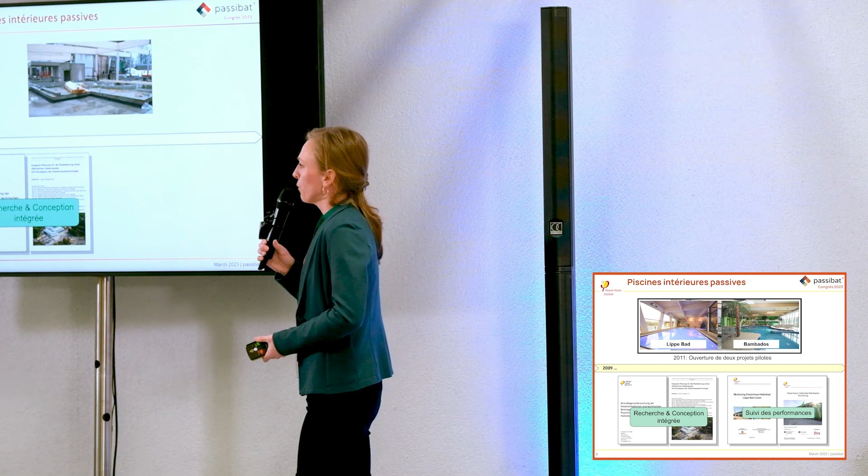And we were very fortunate that in 2009, when this whole journey started about passive house for swimming pools, we were approached by a municipality in Germany, and they said, we want to explore this. We want to see what the energy savings are. We got funding for a research project based on an example of a real-life project.

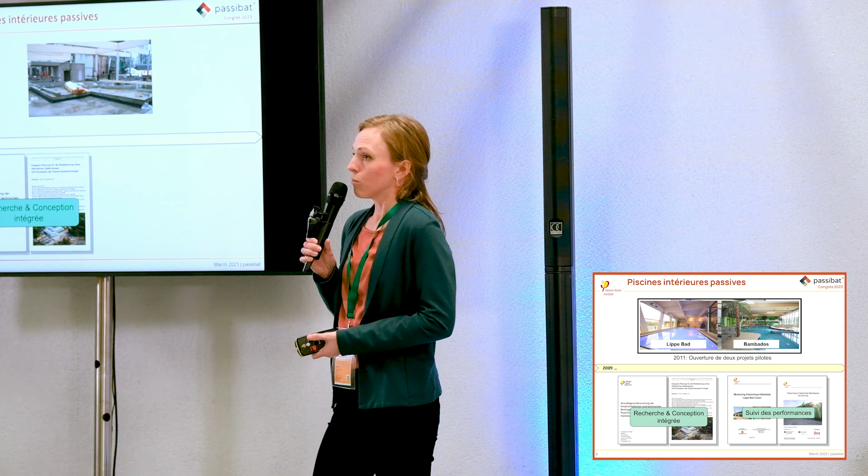That was the first pilot project built in Germany as a swimming pool to the passive house standard. A second one quickly came on board, and these first two pilot projects, the Lippebad and Bambados, they both opened their doors in 2011, implementing these energy-saving strategies that we'd researched and developed together with the teams.

As proof of concept, which is super important in order to move things forward, we had 2 years where we were able to monitor both of these projects in quite a lot of detail to check what the actual energy consumption is and whether the research that we'd done in advance was turning out in practice. So that's kind of the step that we took starting 2009.

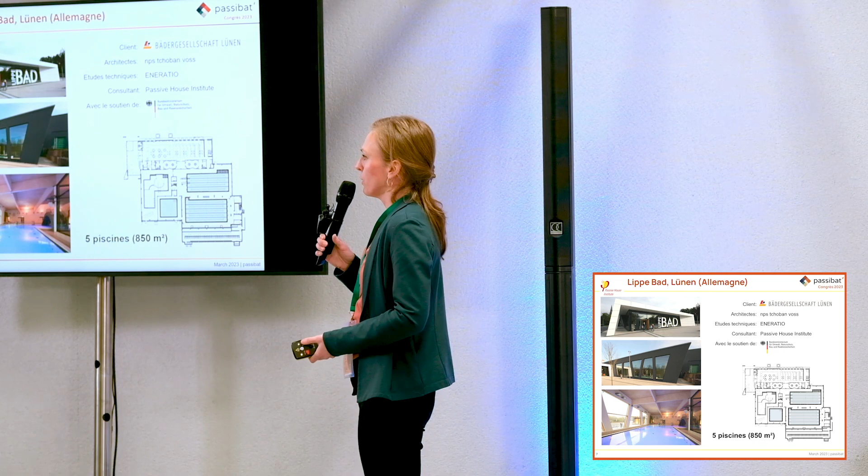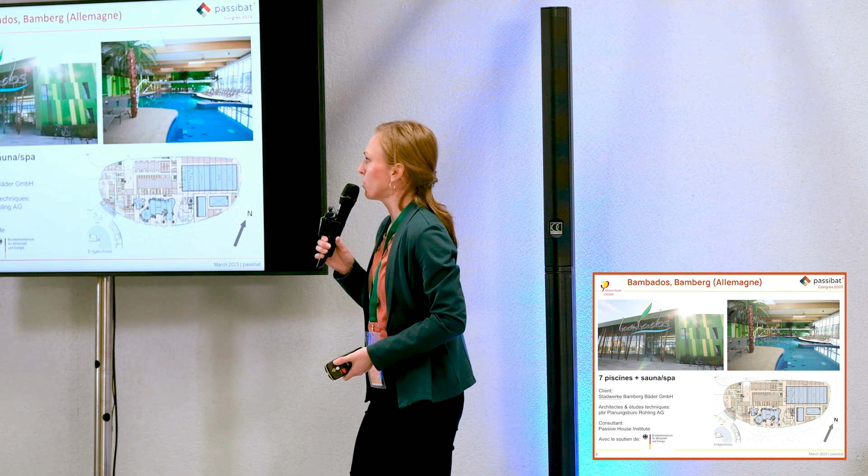A quick overview of the story of success for both of these projects. This is the Lippebad, which is a fairly straightforward project. It has 5 pools, but no kind of additional leisure facilities. And this is the Bambados project, which is larger. It has 7 pools overall, and it has also a sauna and a spa facility included.

So those were very successful, very, very popular. Which meant we were able to continue our research, build on what we'd done, see what additional energy savings we had, and we had additional municipalities coming up saying, this is really interesting, how can we implement this? The third project that's come online is the Exeter City Council project, which actually opened its doors last year in 2022, and is the third passive house project which is now in operation in the UK.

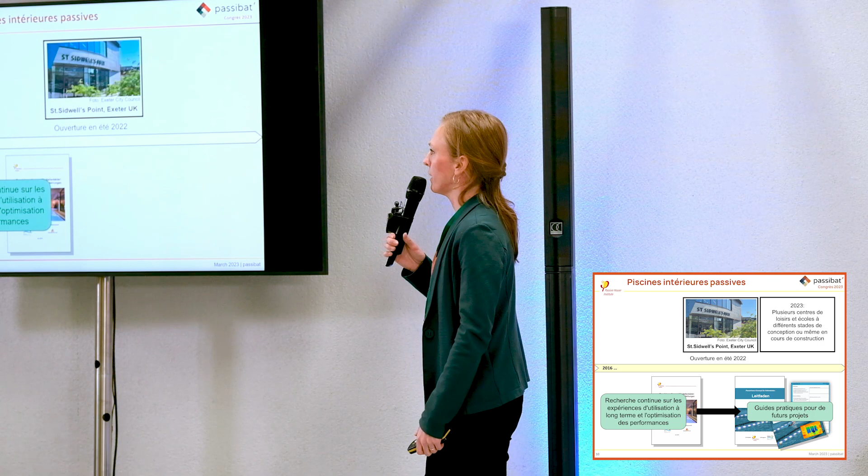What's come out of all our research work? So while we were consulting on the project in England, while we were doing additional research work, we consolidated all of that into a guideline booklet because we wanted to make sure that all of this information is published in a way that future projects can take this on board and implement those energy saving strategies in their project. And it's this guideline really that I'm going to present to you in a very, very condensed form today to give you an outline of what the energy saving strategies are.

We now have quite a lot of interest, especially in the UK, because that Exeter project has raised a lot of interest. So we're working on a number of projects in the UK now implementing these same energy saving strategies.

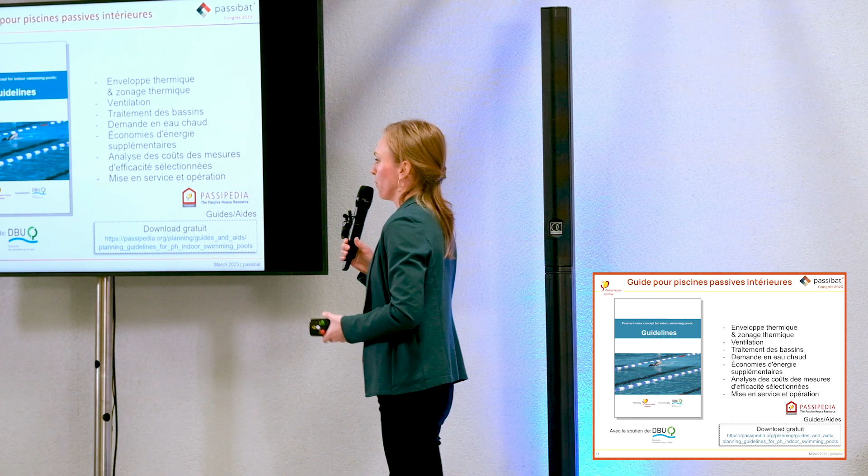So this is the guideline. It's published in both German and English, and available for free download on Passipedia online. It covers different aspects of energy saving, starting with the thermal envelope and thermal zoning within these buildings, but also looking at aspects such as water treatment, ventilation strategies, general energy efficiency strategies, and controls and operation to ensure long-term energy savings. I'm going to give you a very quick, condensed version of those main topics, but I do encourage you to go ahead and have a look at those guidelines if you're interested.

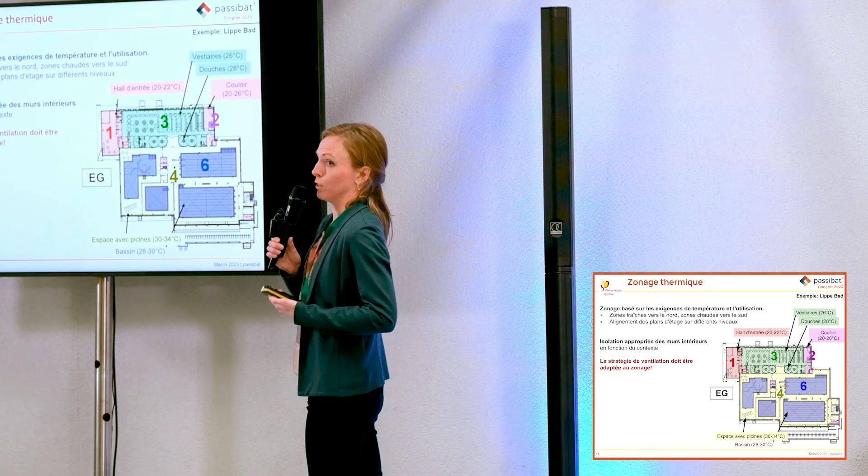Starting out with the thermal zones, this is really the starting point. When you design a building, a leisure center or a swimming pool, think about the different temperature zones you have in the building and the layout you're going to have. If you want an energy efficient solution, that's your starting point to make it cost effective and functional. In this example from the swimming pool in Lünen, we've got warmer temperatures, 30-34 degrees, for the pools facing south, then a buffer zone, the changing room around 26 degrees, and then a 20-degree entrance area. It's a fairly simple layout in this case, but that makes everything else a lot easier and cheaper to build.

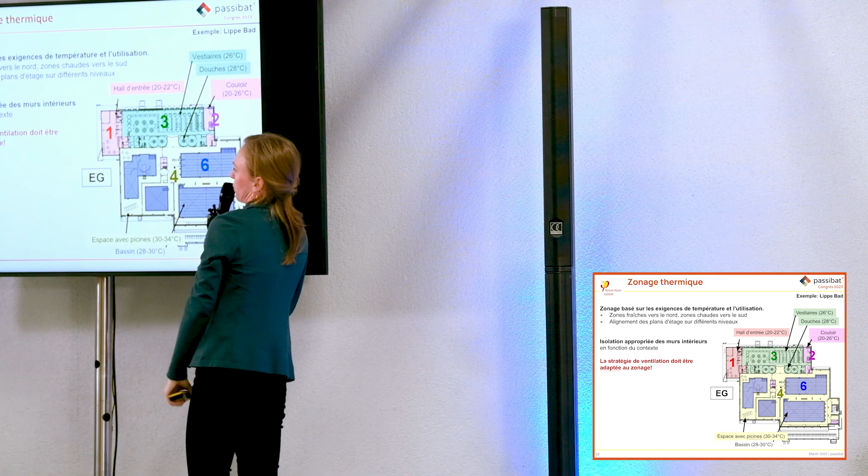Something to keep in mind is you might also need thermal separation within the building itself, which you don't often have in a passive house, but you do in this case, in order to separate these different zones. Also important is to try to align your ventilation strategy with these different zones, so maybe you have a different ventilation unit for each usage zone.

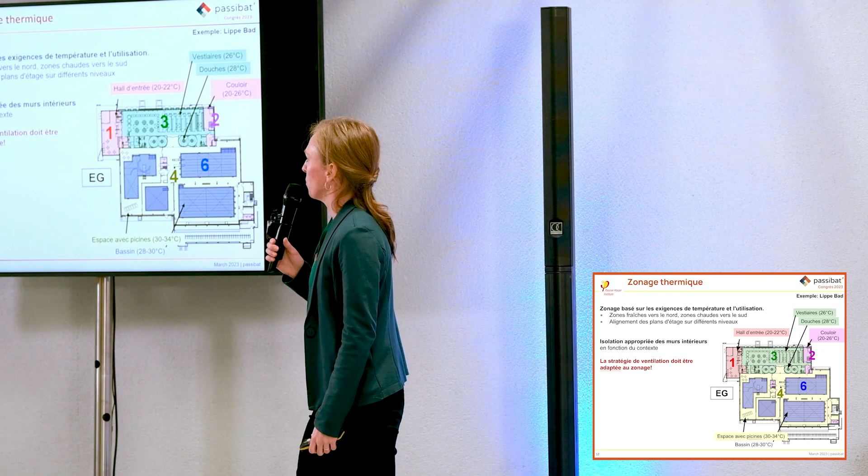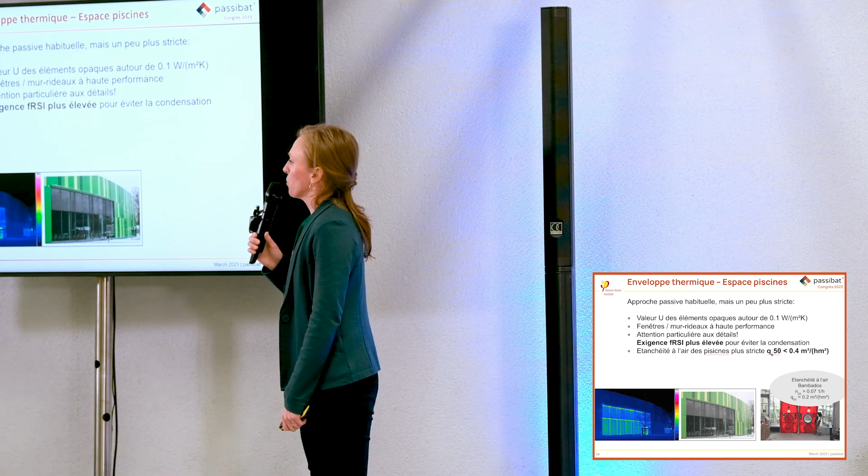In terms of the thermal envelope, I won't dive into too much detail because it's the same principles we're familiar with from the passive house, just slightly more strict. For a pool hall, we're looking at U-values of around 0.1 watt per square meter Kelvin. What's really important here is that we need to avoid damage to the construction, so we have slightly stricter requirements for thermal bridges, outlined here in the fRSI factor.

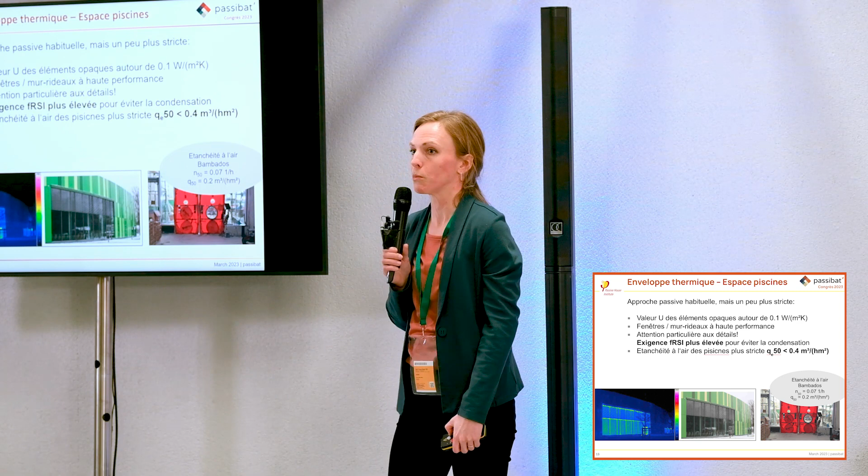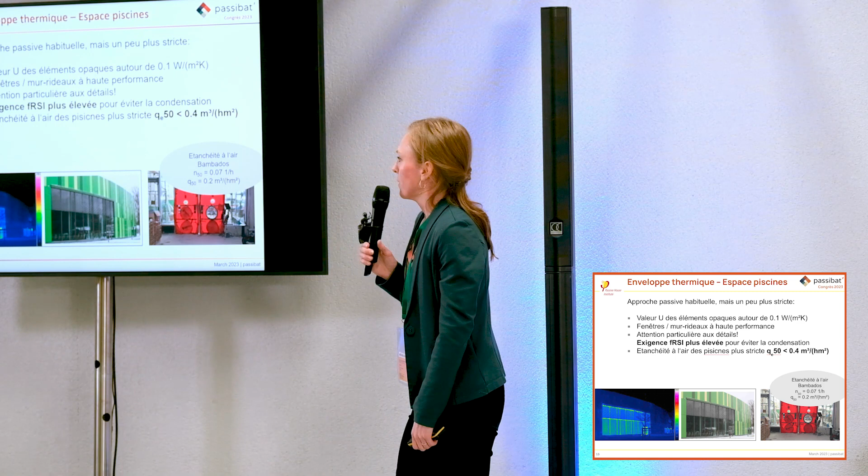In terms of air tightness, again we're a bit stricter, mainly because we're dealing with warm and humid air and want to protect the fabric. The development team in the UK, for example, was very scared when we issued this as our target for passive house certification, but all three projects managed to hit it without problem. This is the example from the Bambados, which had an n50 of 0.07 air changes, an incredible result. So it's doable if you know from the outset that's what you're aiming for and you have good quality control on site.

Overall, the passive house envelope is our entry door to energy savings. If we implement those 5 pillars of passive house that we're familiar with, we already achieve quite a lot of energy savings by reducing transmission losses. The really nice thing with the energy efficiency concept for pools is that the envelope is the starting point and enables you to dig deeper and achieve more energy savings by changing your mechanical systems and controls as well.

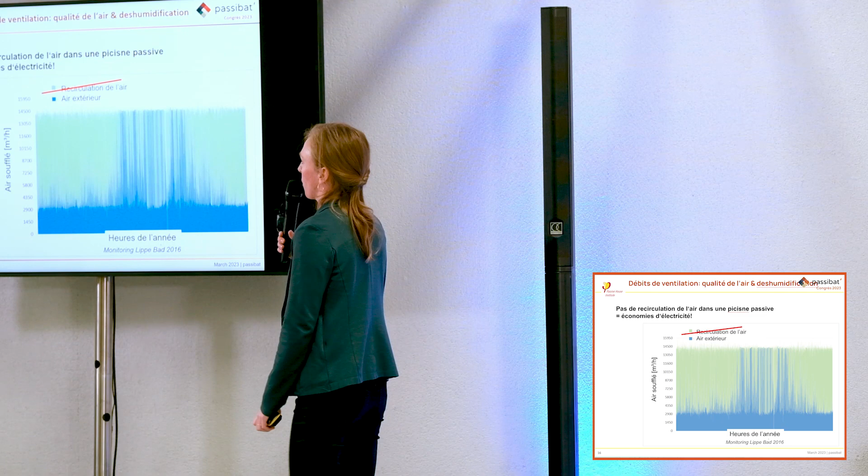Part of that is we now have a much improved thermal envelope, which means there's much reduced risk of condensation or mold on the facade, which means we can change the concept of ventilation in these pool halls. Conventionally, pool halls are run with very high rates of ventilation throughout the year, as we can see in this graph, measured from one of the projects. The blue here is what we need for dehumidification.

That physically is what we need over the course of the year. In winter it's quite low, in summer it's high because we have higher dehumidification demand. In green here in the background is what a conventional pool runs throughout the year as additional recirculation, because in a conventional project you need that air movement. We don't need that anymore in a passive house pool because our envelope is so good, so we can cut out all of this green part, which translates into significant electricity savings just by cutting out the recirculation air.

In addition, because we have a really good thermal envelope, it means that we can raise the humidity level at which we operate the pool. Raising the humidity level has different advantages. One significant one is that we have less evaporation. Less evaporation means less heat losses from the water. It also means less dehumidification demand, which means less ventilation, and so on and so forth. As I said, it gets quite technical, but the quintessence here is that because of that better thermal envelope and the higher humidity, we tap into more energy savings for our heating and electricity.

So that was a quick run through in terms of the main starting point for the pool hall. Obviously, there are many other energy consumers in these types of buildings. It's not only about the swimming pool hall. There are other energy consumers as well.

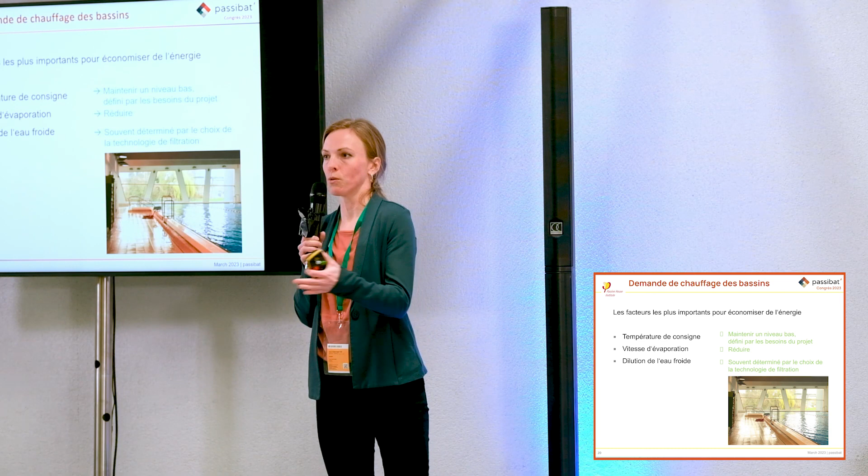Then last, but certainly not least, one of the most important aspects that decides your energy demand for the pool water is how much fresh water you have to bring into the pool in order to maintain its quality. This, quite interesting, is often not driven by the amount of people in the pool. It's actually driven by the choice of your filtration technology. Depending on what filtration technology you use, you have to keep those filters clean, you have to backwash them on a regular basis. And the choice of that filtration system often drives how much fresh water you're constantly bringing into the system. So it's worthwhile, when you choose your filtration system, to be aware of what kind of water demand that means.

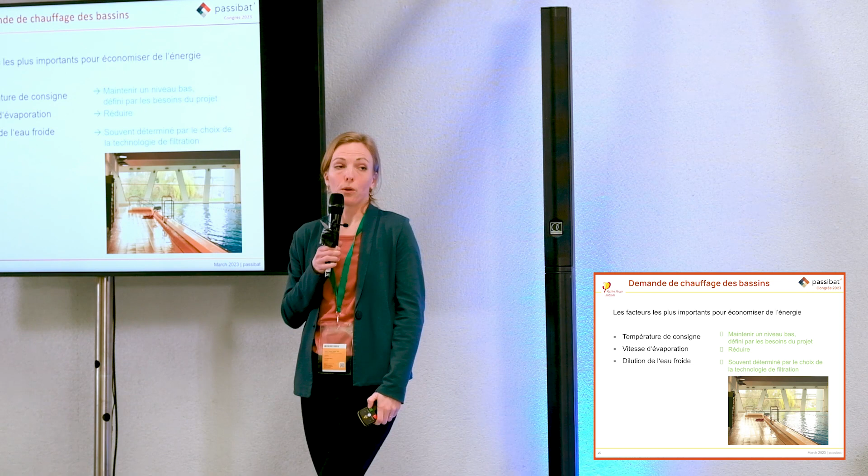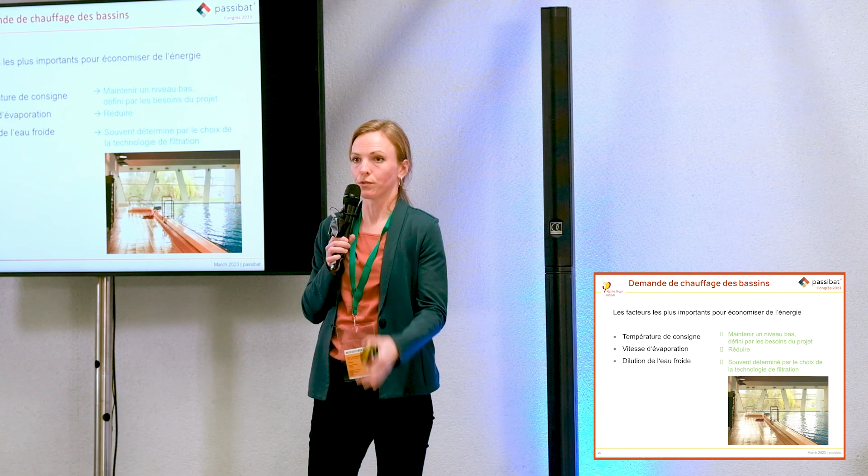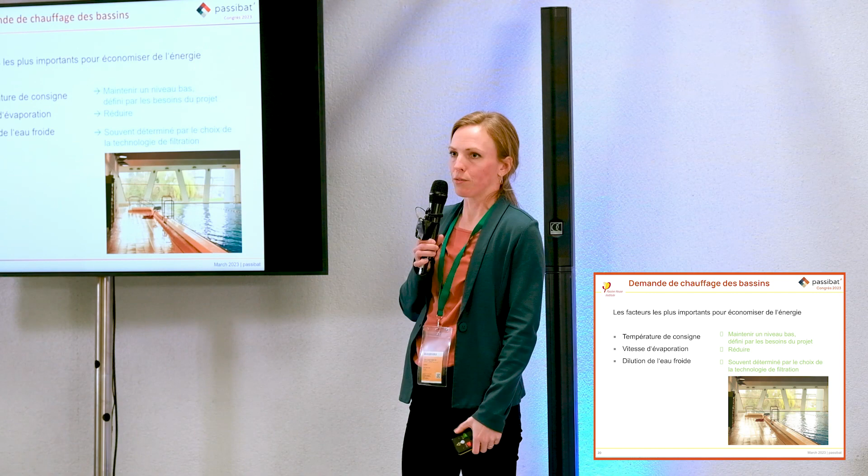Now, the Passive House standard, the way we approach it, we don't prescribe a specific filtration system because there are different reasons for using different filtration systems. We do look at what the implications are in terms of energy needs. And if a filtration system of choice needs a lot of water, which means higher energy demand, then you have to compensate that by other means, for example by using heat recovery on your wastewater for the pool system.

Okay, so that's a quick run through on the actual water heating. The other aspect for the water is the electricity demand for the constant water treatment and water circulation. In order to keep the water at a high quality, we have to circulate it basically 24/7, keep it in movement, filter it, and disinfect it. Again, there are different technologies to do this, and we don't prescribe a specific one.

What we do look at is what the electricity demand, the actual energy demand, is to be able to run that system. Again, lots of details you can dive into, and as part of the design it's important to understand your system and the energy implications. One really important part here is the pumps for circulation. All of our energy analysis and research showed that looking at those pumps for circulation is absolutely crucial in order to bring your energy demand down.

They run 24/7. You have to run it at a specific rate in order to maintain water quality. What's really important here is a design aspect. This is not something you can change later on, but the layout from the very outset of the project, keeping that pipework short, reducing your pressure head, selecting appropriate pumps, is a design issue at the very beginning.

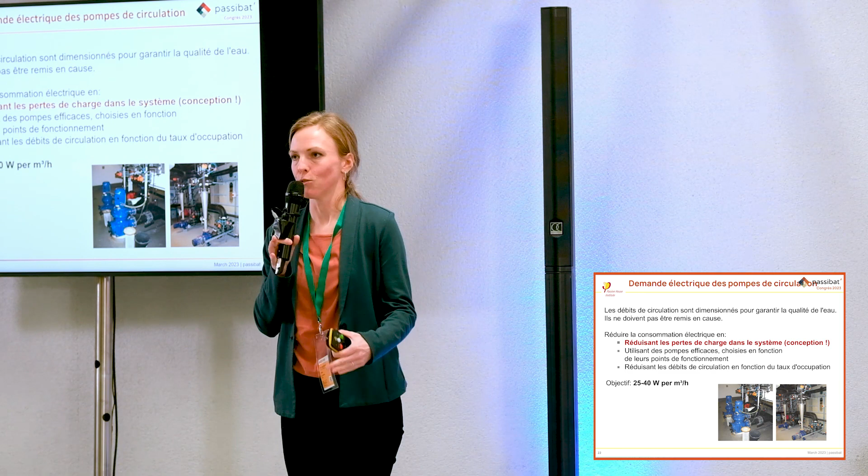What we've done as part of our pool guide is to give an energy target here and say our goal is maximum 25 to 40 watts per cubic meter an hour that you're circulating with that water. On every single project we've consulted so far, the pool technicians have come back to us and said impossible. But then when you work through it and really look at it from the outset, from the design, you reduce those distances. It is possible, but you do have to work hard to do it.

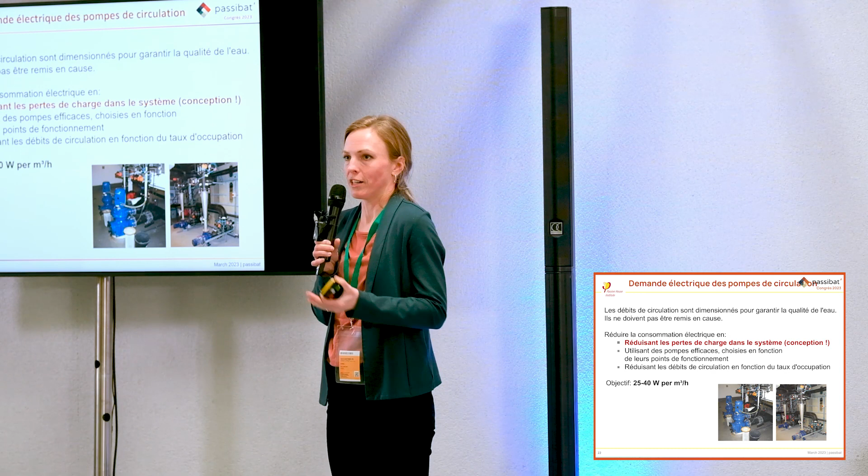But it's super valuable because it's something that doesn't come at additional cost. It's really mainly a design issue at the beginning of a project to get there, and it has long-lasting energy-saving effects.

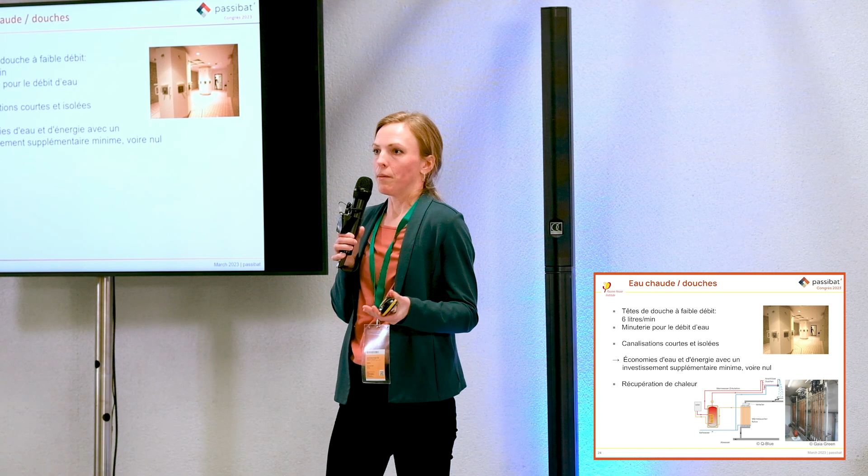Next topic that we're touching on is our hot water demand, so this is for the showers mainly. There's nothing too spectacular here, this is all technology that we are familiar with from the Passive House scene. There are again design aspects that we can keep in mind that don't mean additional costs necessarily, but are just logical in order to reduce energy waste. For example, keeping your pipework short, trying to lower the temperatures of your distribution, working with low flow shower heads, those kind of design aspects.

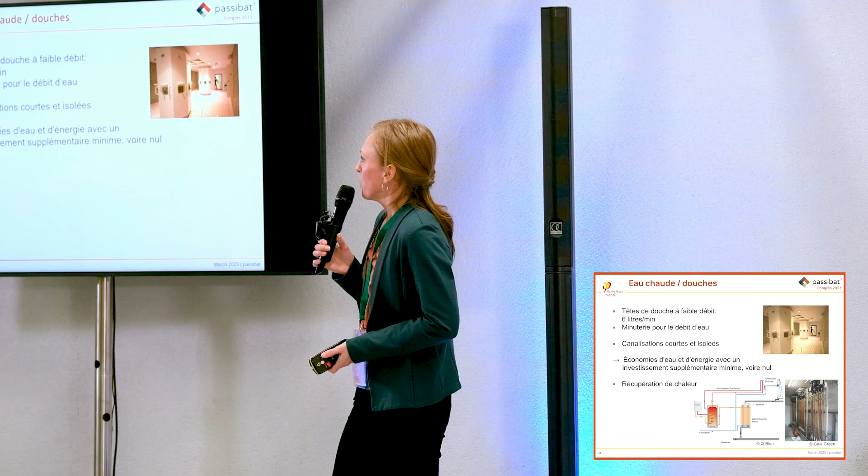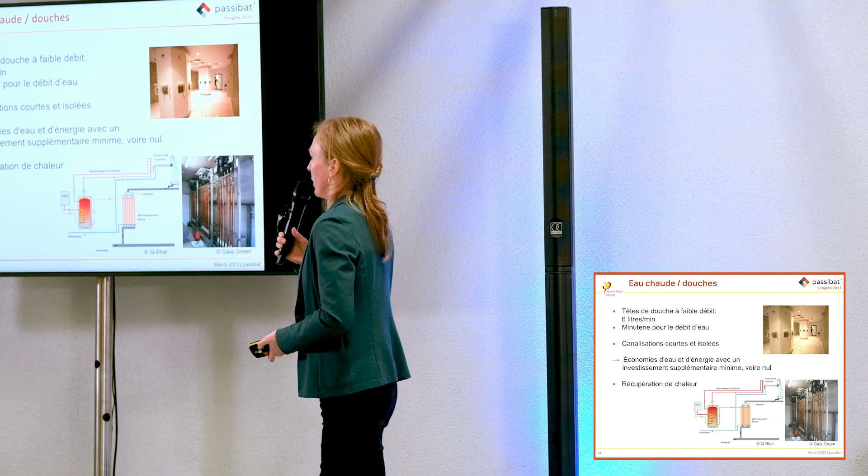Something that we're pushing for more and more, which hasn't been implemented in the pilot project so far, but we are pushing for in the future project or the ongoing projects, is to consider wastewater heat recovery from the shower water. There are more and more systems available, I think there's even some exhibitors here at the conference. I think it's more popular in France than it is in Germany at the moment, but there's a lot of saving potential here to have wastewater heat recovery from the shower water, just because there's constant shower use in these kind of projects. So it just makes a lot of sense.

Right, and then last but certainly not least, we have all this extra electricity demand in this energy balance here, which covers ventilation, it covers lighting, and it covers all sorts of additional equipment. The additional depends very much on your type of project, so what other facilities you include, so I won't dive into details. I do want to touch a little bit on ventilation.

Again, the strategy here is the same as what we're familiar with from the general Passive House approach. We have our limit for our electrical efficiency, and we have our limit for our heat recovery efficiency. For the heat recovery efficiency, we do have higher requirements for the pool hall because we have higher temperatures and humidities to deal with. So again, Passive House approach, but a little bit stricter.

What's really important in these projects is that yes, you might have to dimension the ventilation units to be able to deal with high humidity loads in summer and high occupancy rates, but there's a lot of saving potential here with demand control. Being able to ramp down the systems in winter when it's drier or when you have less occupancy, so that you don't overventilate and you don't have too much electricity consumption for the fans.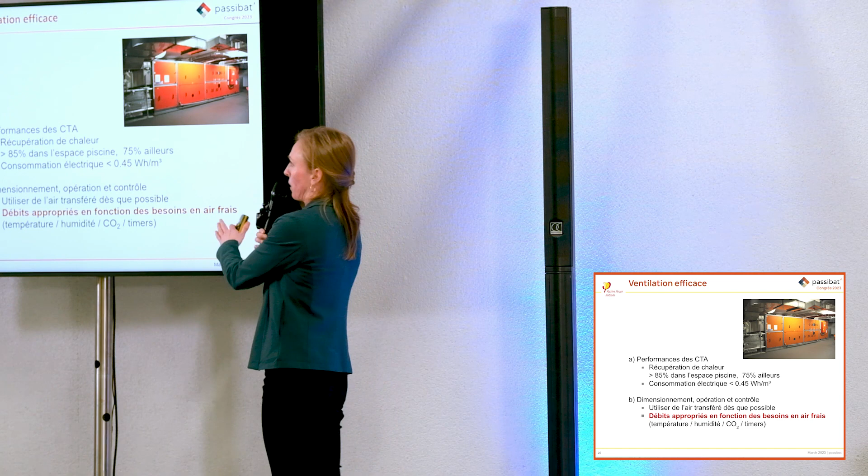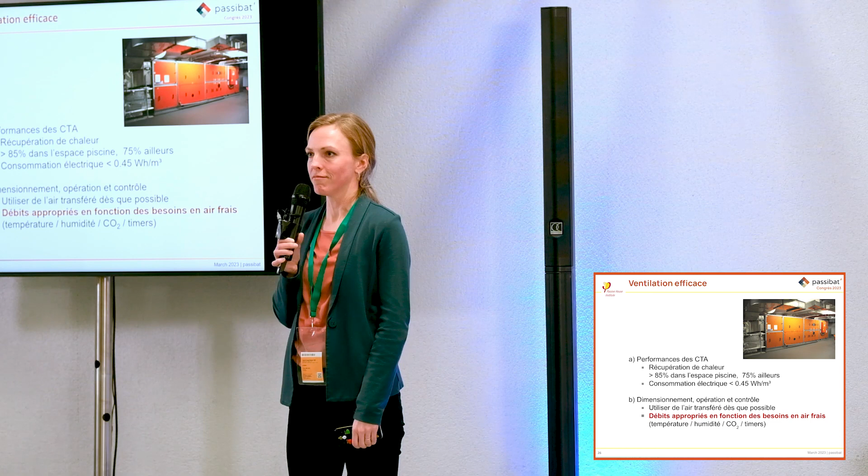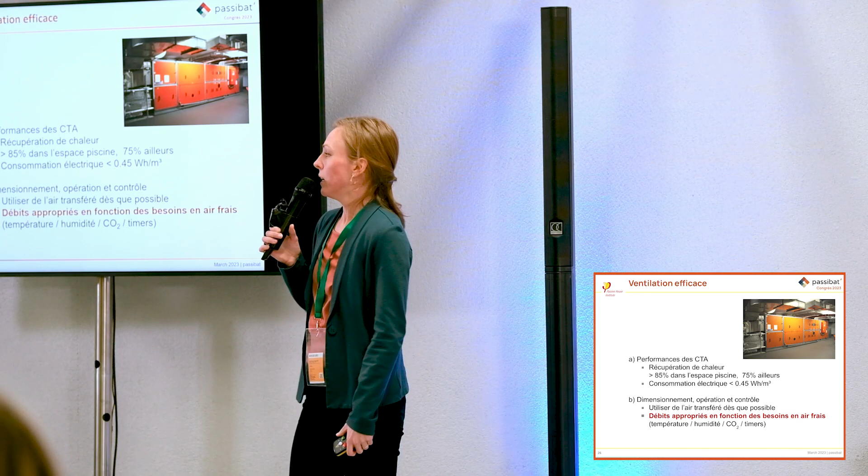A big takeaway for me from the projects we've implemented so far, a big learning here, is to try to keep it as simple as possible. There's kind of a trend to try to get everything as detailed as possible, control on CO2 and humidity and all sorts of sensors at the same time. My experience is that that's very difficult to commission and then also to make sure that it's operating the way that you want. So it's better to try to keep it simple, maybe set kind of a low-level ventilation rate that's suitable for low occupancy, and then have it ramp up only when you need it, for example based on humidity. But try to keep the systems as simple as possible.

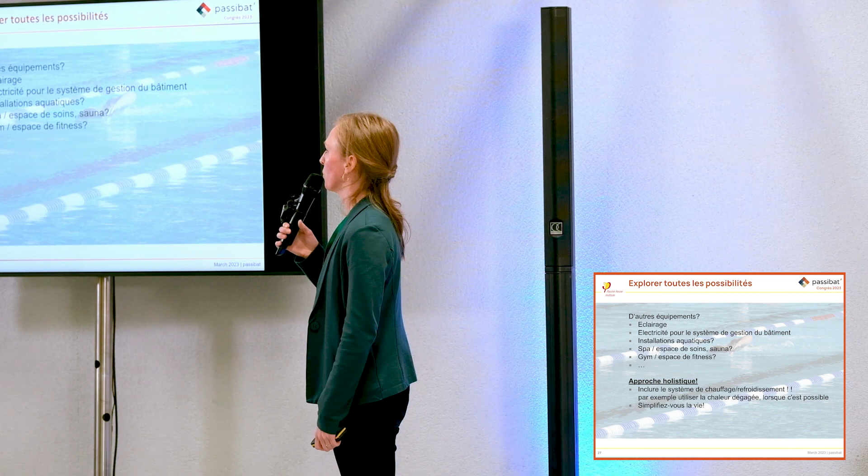Well, and all the other equipment, obviously looking out for lighting. We have some efficiency guidance for lighting in the pool guide. Then it's things like the saunas, the lifts, it's all the other equipment. And again, holistic approach of Passive House, important to be aware of that equipment, to model them at the outset, understand the energy demand, and see where the energy saving potential is. Yeah, so it's all about the holistic approach.

So what we also have in some of these projects is part of the building might need active cooling, the gym for example, whereas other parts of the building need heating all year round, whether it's the pool water or the pool hall. So heat pumps technology nowadays can do simultaneous heating and cooling.

So you take the heat from one part of the building to heat other parts of the building. Make sure to look at the building as a whole, and as I said, don't overcomplicate. Try to keep the system simple and robust.

One of my last points is to emphasize that it's not only about the design or the choices of your components, it's also a lot about your controls, and about commissioning the systems in the way that you intend them to be.

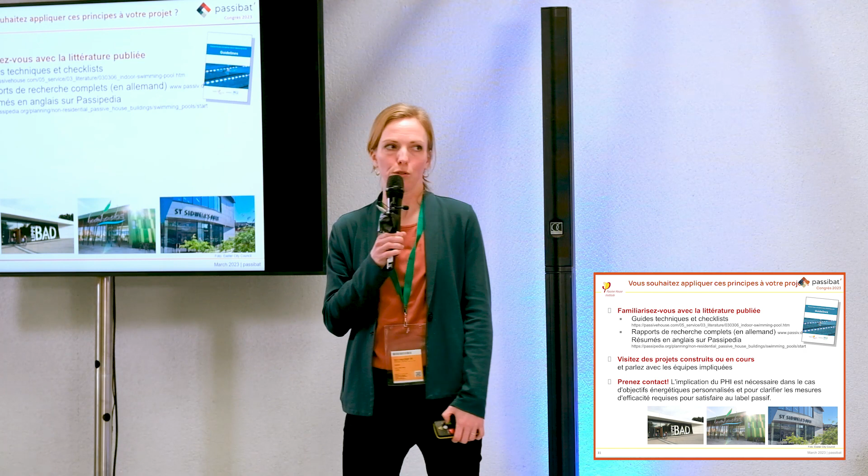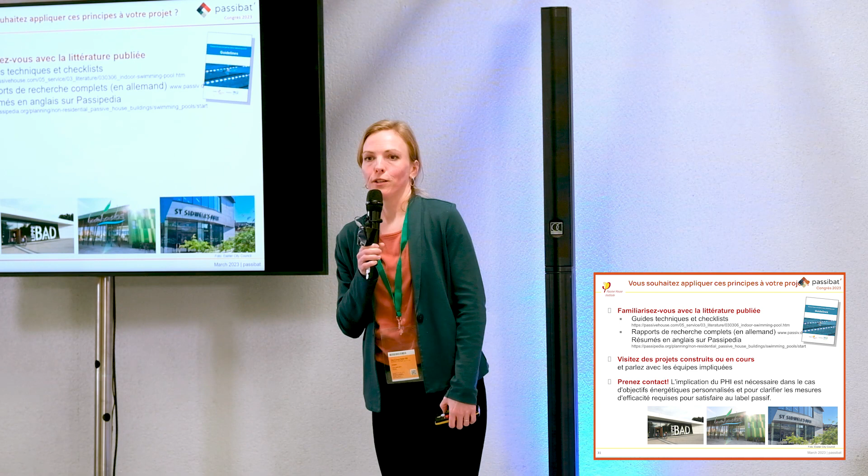I'll leave you with a quick outlook if you're interested in learning more about this topic or applying it to your own project. The starting point is to read and inform yourself using the available information—the guideline is quite comprehensive and gives a good overview. It's available in German and English. If you speak German and want more detail, we've published extensive reports on both pilot projects with detailed monitoring data and so on.

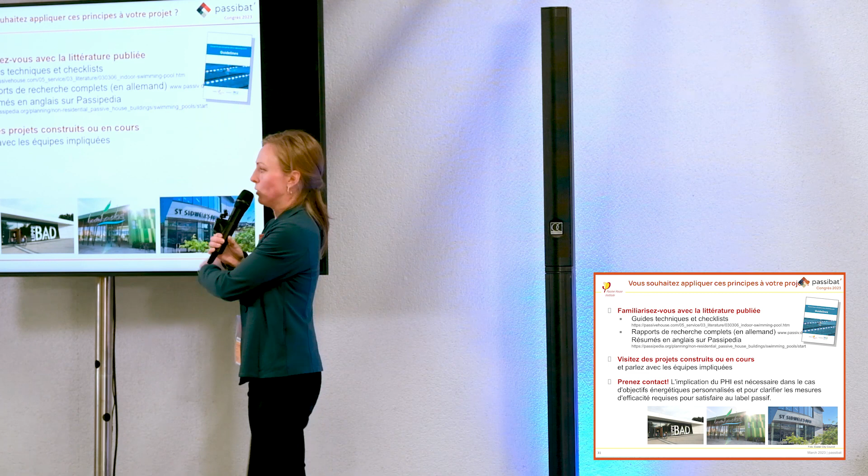Second step is, if you can, go and visit some of these projects. This project in England only happened because the designers and the municipality visited those two projects in Germany and were convinced that it really worked. They learned a lot from speaking to the people who implemented this beforehand—the original design teams.

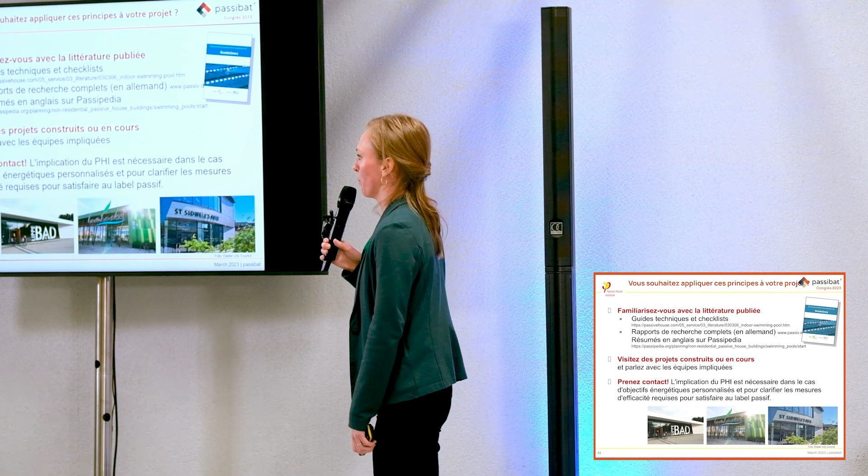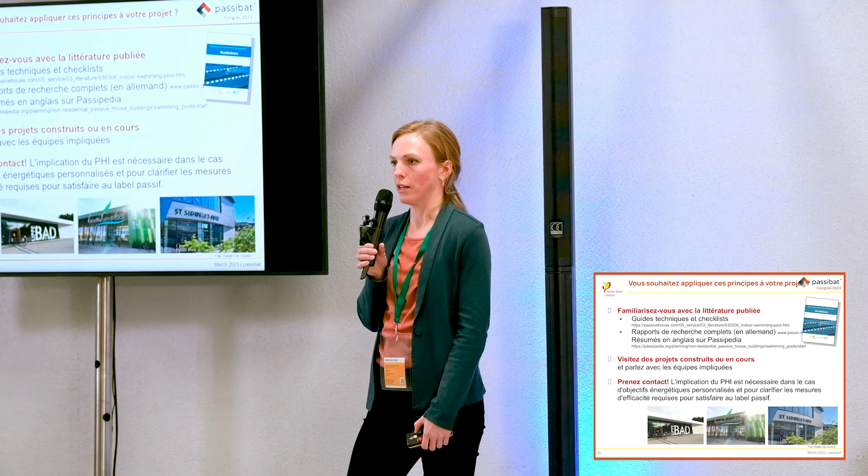The third point, if you're interested in applying this to your project, is to get in touch with the Passive House Institute or an accredited certifier in your region, and we can work together to help identify the energy saving measures and what needs to be done to achieve the Passive House standard. That brings me to an end. Thank you.